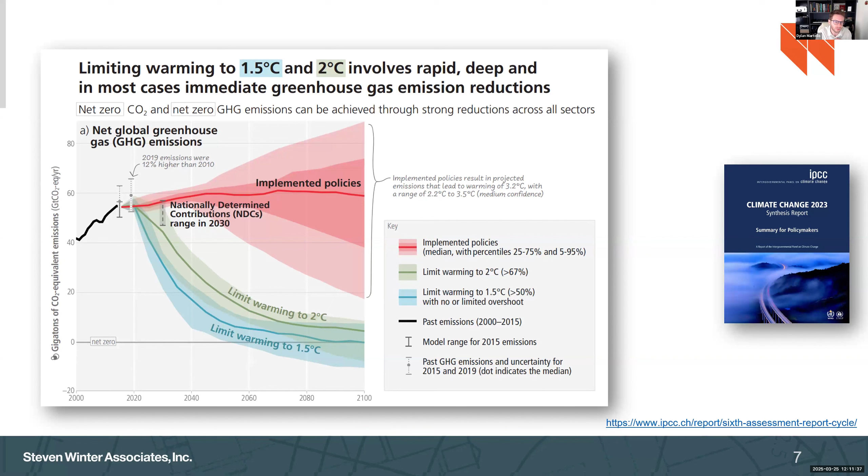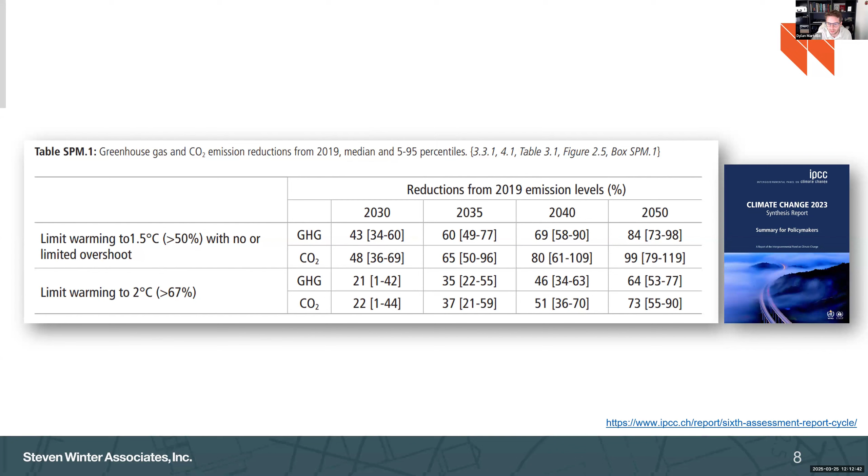So this is why I joined this field of building design and passive house design - sustainability, addressing the climate crisis that we're in. We can make an impact. We, as passive house designers, or for folks on this call that are maybe on the design side, developer side, or policy side, wherever your role may be, we are the ones that can make an impact. And I live with this question and concern in my brain all day: how can I, and how can we, make an impact to help address this problem? I think PHI LEB plays a really, really big role in this, or can play a really big role in this, especially now.

Before diving into this standard, I want to just talk about the origin story of this standard for me. So we're going to go back in a time machine 6 years ago to 2019, to a town in Massachusetts, Newton, Massachusetts, just west of Boston, not too far from it, greater Boston area, and a project that many of you probably have heard of on other presentations or conferences, the Northland Newton development. This is, as you can see, a very large scale mixed use multifamily development in Newton, Massachusetts. This is from 2019. There's some shifting in the plans that are kind of underway right now, but the general concept of this development is still intact.

Back in 2019, we engaged with the design team and ownership on this project. It's 13 buildings, most of them multifamily mixed use, with over 800 apartments, about 18% of those affordable.

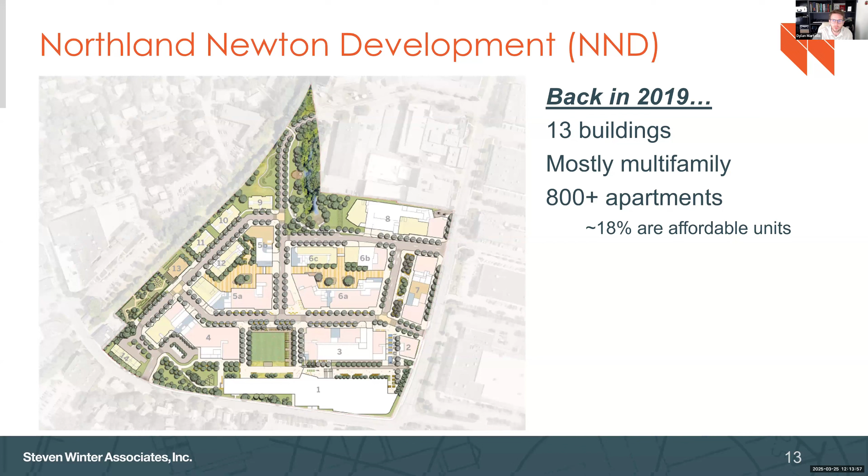For a few reasons, they made the commitment to go to passive house for buildings 3, 4, and 8 - three out of the 13 buildings on the site. This accounted for about 275 units, 410,000 gross square feet. These buildings were anywhere from 4 to 5 or 6 stories or so.

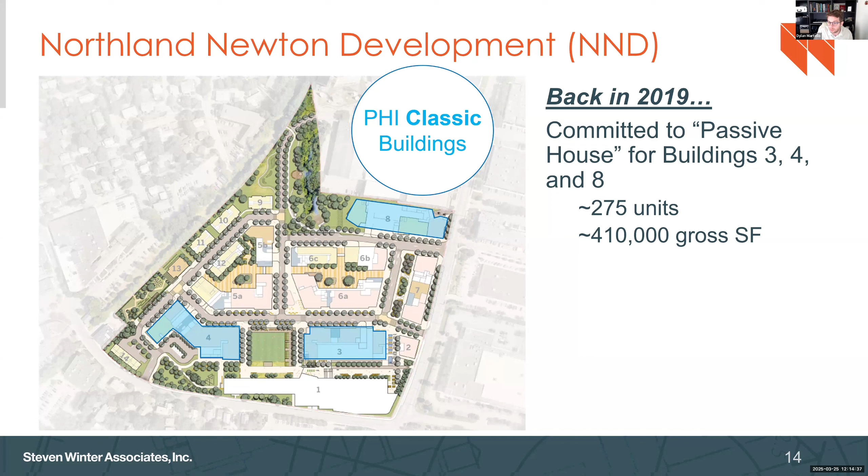So large scale multifamily, I would say definitely falls into that category - not super tall like you might see in a city environment, but still large scale multifamily. In the state of Massachusetts, for the last 4 or 5 years there's been a really awesome incentive program by Mass Save that has incentivized passive house construction immensely.

This has been a huge part of the extreme growth we're seeing in the Massachusetts market. They incentivize particularly feasibility studies, which I feel are one of the best ways to make a huge impact on a project - just do a feasibility study, get your foot in the door, let the design team know what it would take to get to the passive house level.

In particular, we looked at this building, building 12, as it relates to the LEB standard. I'll get into that in a minute.

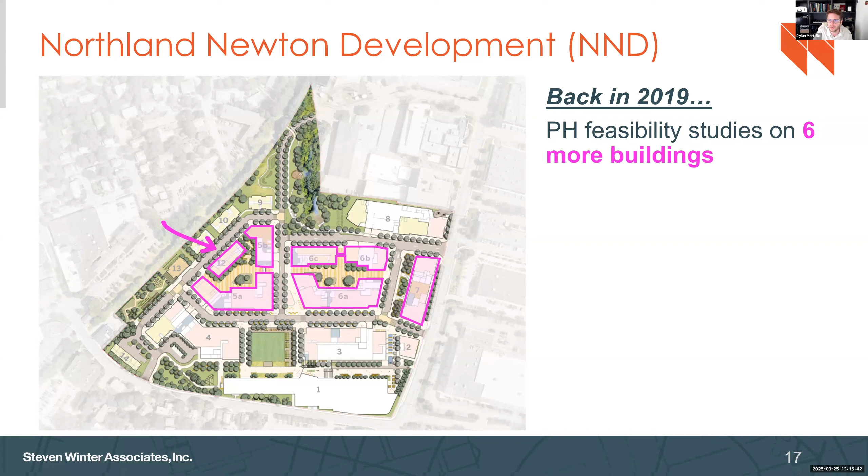So this building was 4 stories, 31 units, 37,000 square feet. It wasn't massive, but it was still big scale multifamily. It wasn't a townhome, it had over 30 units, starting to really inch into the realm of these bigger scale multifamily projects where we see that you get economy of scale, you get efficiencies in the surface to volume ratio.

Of the building envelope, we see with these bigger projects as well that we don't need maybe as much R value in our wall, or as high of a solar heat gain coefficient in our windows, because the bigger the project, the more the internal loads in the building dominate and the less the solar loads have a role in there.

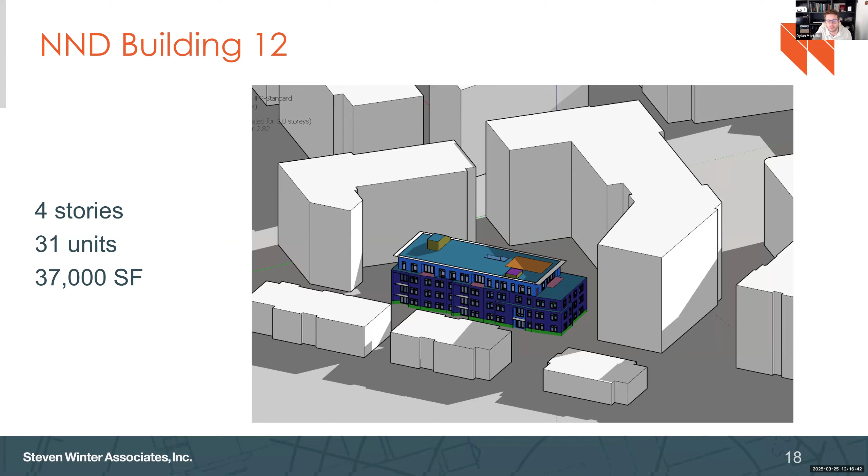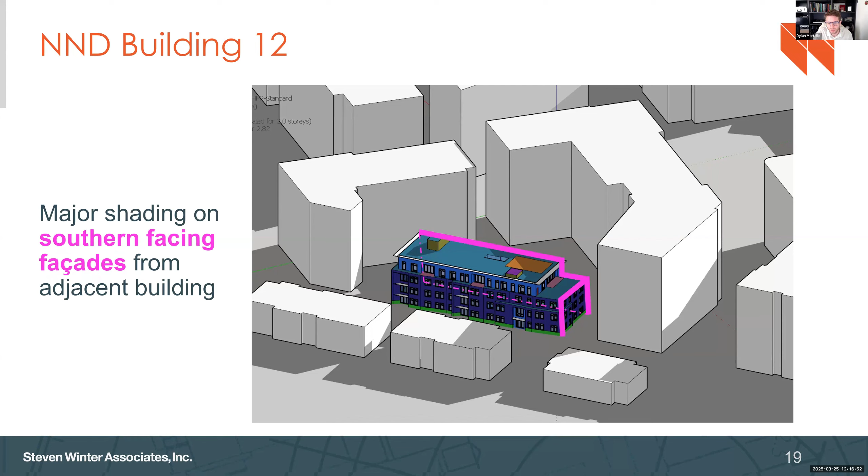That said, solar loads do still play a very important role in passive house design, really no matter how big the project is. On this project, there is some major shading on the southern facing facades from the adjacent building, and this led to some big challenges.

As a result of this shading, or taking a step back, just looking at sort of the baseline level of design specs that we were looking at for this project as a starting point: above grade walls of R33, roof R values of R57, windows - triple pane, highly efficient insulated glazing units with a U value of 0.16, SHGC of 0.37 center of glass - solar heat gain coefficient - and ventilation heat recovery efficiency of 82%.

So these are all very good specs for a multifamily building. I think it's pretty common to see these levels of performance being required for passive house design in climates like Massachusetts and the Northeast in general.

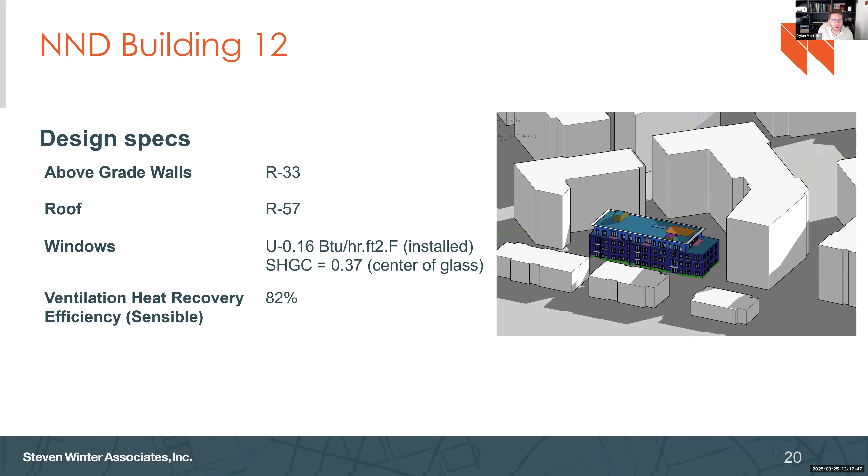Even with these specs, though, we struggled mightily to meet the PHI classic criteria. I'll get into the different categories in a minute, but the conventional passive house criteria that I think most of the industry is familiar with has limits on heating demand, limits on cooling demand, and primary energy, which is source energy for the building.

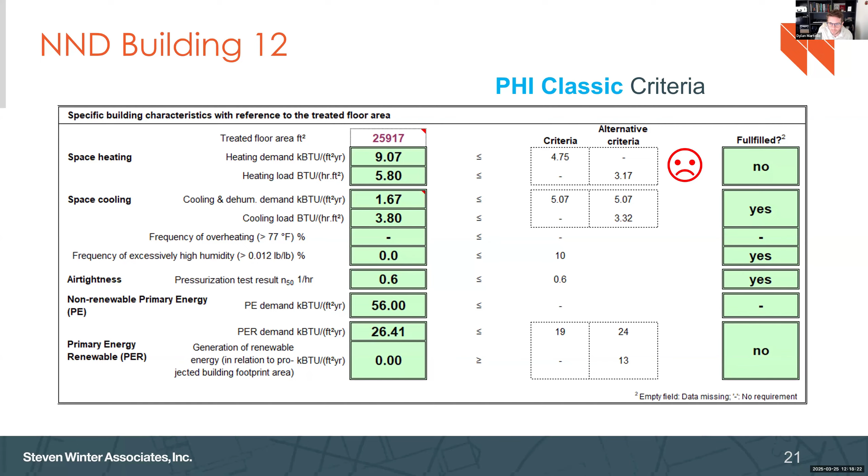We were nearly double the heating demand of the PHI classic criteria as a result, largely due to this shading. So we were like, what do we do?

We want this project to still commit to a high level of performance, something like passive house - we just have no way of getting there. There's no solar heat gain coefficient that's high enough that we can get this heating demand down. There's no R value big enough, or large enough wall size that's going to help get this heating demand down. So we felt like we had our hands tied behind our back.

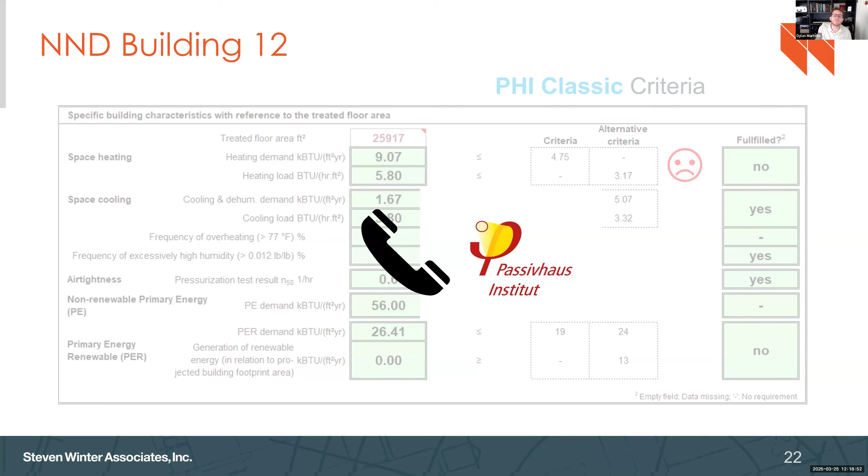So we called Passive House Institute and said, what can we do? And that's when they actually introduced the LEB criteria to us. They said, well, we have this alternative criteria called PHI LEB, and it's reserved for, or it can be used for, projects that just can't meet the classic criteria, for whatever reason that may be - if it's shading or whatever it might be.

It was really insightful to get this piece of information and recommendation from them, and it led to some interesting further discussions, which I'll get into in a minute. But before diving into that, I want to talk about what the LEB standard actually is and what the mechanics of this are.

Within the criteria, this is the latest version 10C from PHI. They talk about the different levels of certification for a project. The one we're probably most familiar with is Passive House Classic. There are upgraded levels to that, Plus and Premium, particularly for projects with even lower energy use intensity and even greater renewable energy production. But PHI Classic is the most widely adopted standard for buildings. There's also the EnerPHit standard, which is for retrofits, which I won't talk about here.

And then they talk about the PHI Low Energy Building standard in that criteria as well. So this is just straight from the criteria: buildings which do not comply with one or more of the Passive House or EnerPHit criteria may still satisfy the PHI Low Energy Building standard.

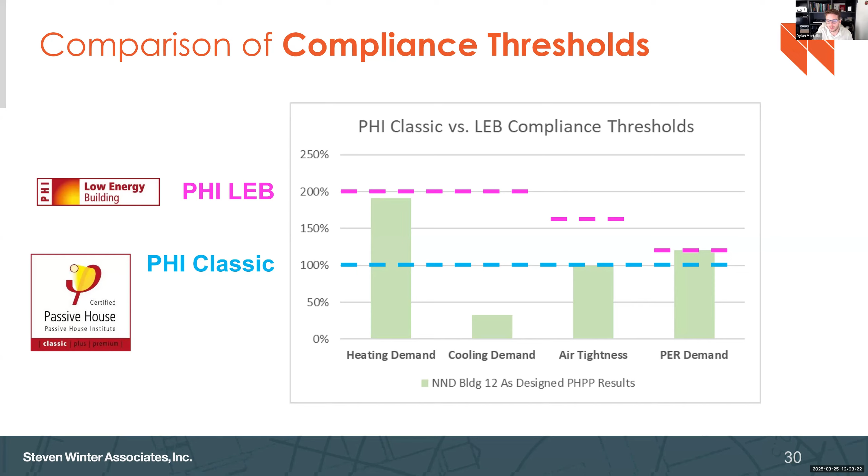So the goals of the Passive House standard, we're probably all familiar with this: steep energy reductions, particularly in heating loads, or steep reductions in heating loads. Really steep energy reductions across the board for these projects, but where Passive House is really, really effective is at reducing heating loads. We're smashing down heating loads.

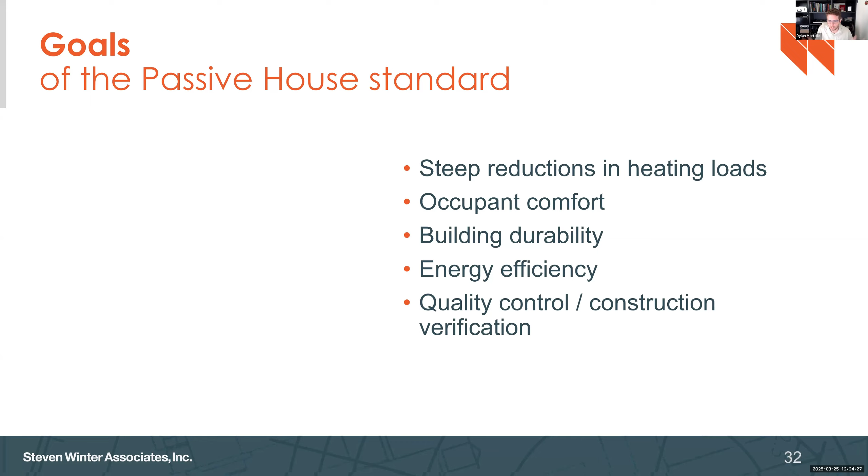It's also really good at providing occupant comfort, building durability and longevity, and reducing potential for mold growth in wall systems and the like. Energy efficiency across the board is obvious, but it's also really, really good at ensuring quality control and construction verification for projects. So you have to do very detailed inspections and photographic documentation of the building as it's built. There's on-site verification of the ventilation system's performance and flows for ventilation air. And then there's the whole building blower door test where we're verifying air tightness for the project at the end of construction. These goals are achieved in both of these standards, PHI LEB and PHI Classic.

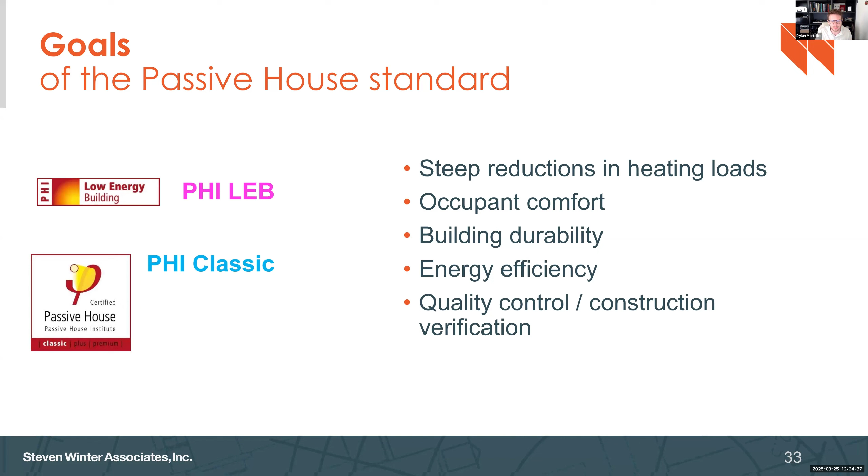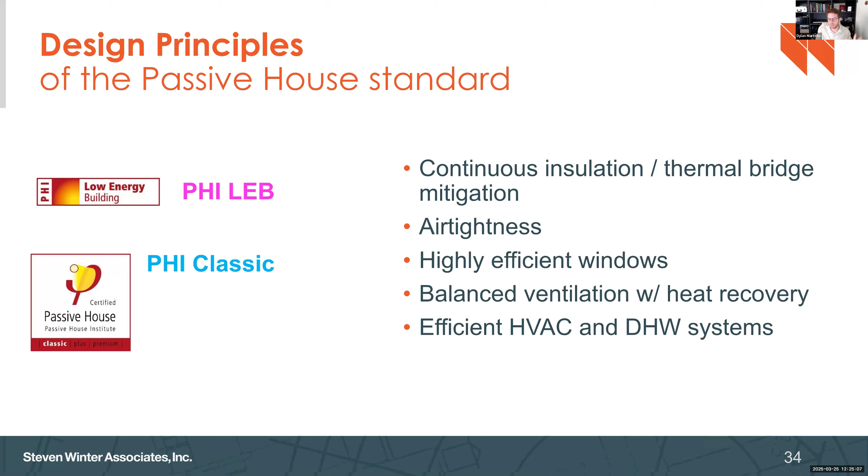When we think about the design principles of the Passive House standard: continuous insulation, thermal bridge mitigation, air tightness, highly efficient windows, balanced ventilation with heat recovery, HVAC, and domestic hot water systems. Again, all of these design principles apply to the Passive House standard, both PHI LEB and PHI Classic. There are just differences in the thresholds that are considered passing or not passing, but the concepts, the principles, and the goals are the same.

So, just some other key differences with the PHI LEB standard versus the classic standard. Air tightness: the PHI classic standard is 0.6 ACH 50, while the PHI LEB standard is 1.0 ACH 50.

There is, however, a specific clarification within the criteria that if a project falls between 1.0 ACH 50 and 0.6 ACH 50, additional on-site leak detection must be carried out during the blower door test.

This requires the testing agency to go around the building, look for air leaks, document the air leakage at that specific location before any sort of measures were taken to seal it, photograph it, seal it with whatever measure is available on site, typically caulk, a spray foam product, or a taping material, and then document how that air leakage was reduced after the seal was done.

So you actually get this extra layer of quality control and verification of potential leakage areas that can still be addressed if it falls between 0.6 and 1 air change per hour. So yes, it's a more relaxed standard, but there are other strings attached to it that help ensure you're not resulting in any problematic leakage areas that could cause building durability problems.

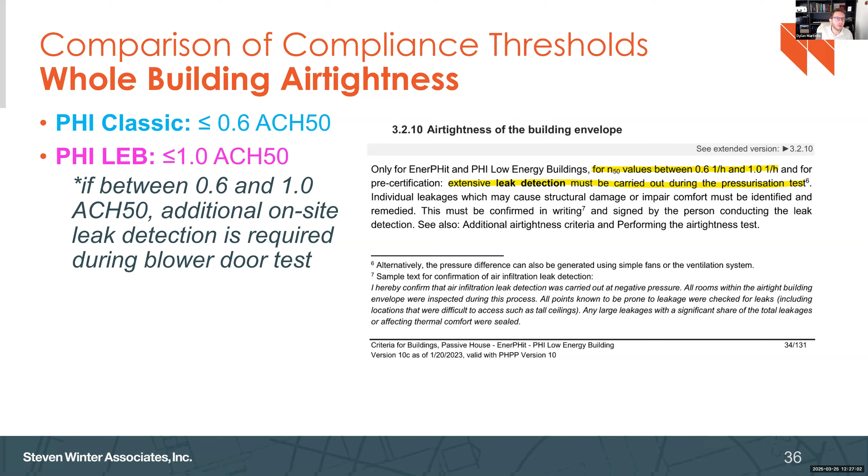The other difference is the thermal comfort criteria is essentially waived for the PHI Low Energy Building standard. This will probably get some questions, but my take on this—and I'll talk about the performance levels required to meet PHI LEB—is that for opaque surfaces, meaning non-windows, so typical above-grade walls, ceilings, and floors...

In our climate, Northeast, particularly Massachusetts, since we're talking about the Northland Newton development prior, you need about R8 in your opaque surface to achieve adequate thermal comfort. This is a check done within the PHPP on the areas tab, and a similar check is done on the Windows tab. R8 is that threshold—you're not going to really pass if your walls are not above R8.

Where this can actually have a big impact, though, is on the performance of windows required. The thermal comfort criteria required under the PHI Classic standard is a U-value threshold for the overall window—this is the installed U-value of the window. So it accounts for not only the glass, but the frame, the glazing edge spacer, and the thermal bridge created at the window-to-wall connection.

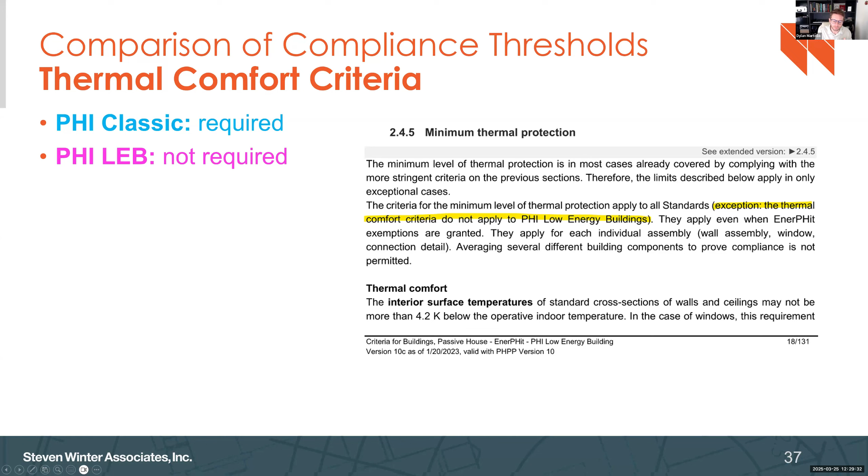More on this in a minute when we talk about specific design specs for projects.

Jumping back to 2019 and talking about Northland Newton Building 12, we reran this project under the LEB criteria. Basically, in the PHPP, you can go in and change the PHI classic threshold—there's an option on the verification tab to select PHI LEB. We saw that we were now meeting our heating demand threshold that was giving us problems before.

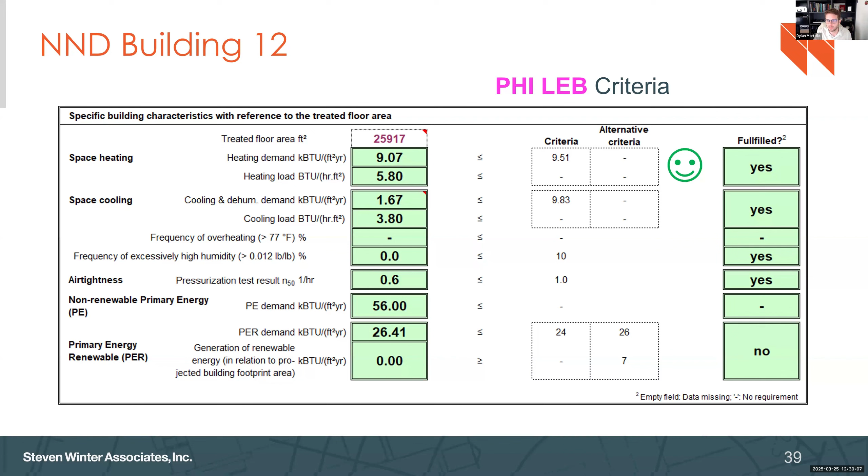It led to an interesting follow-up. As a result of those feasibility studies we did, not only for building 12 but for the other 6 out of the 9 buildings I talked about—those pink buildings—the client realized: hey, we can actually commit to the PHI LEB standard on these 6 other buildings. We were introduced to this concept for building 12, and I think there's no reason we wouldn't do it for building 12.

So why wouldn't we do it for these other buildings, when we can expand our commitment to passive house. The challenges of meeting Classic on Building 12 and some of these other buildings, which were heavily shaded, particularly on the southern facing facades, just allowed a pathway for this client to expand their commitment to passive house.

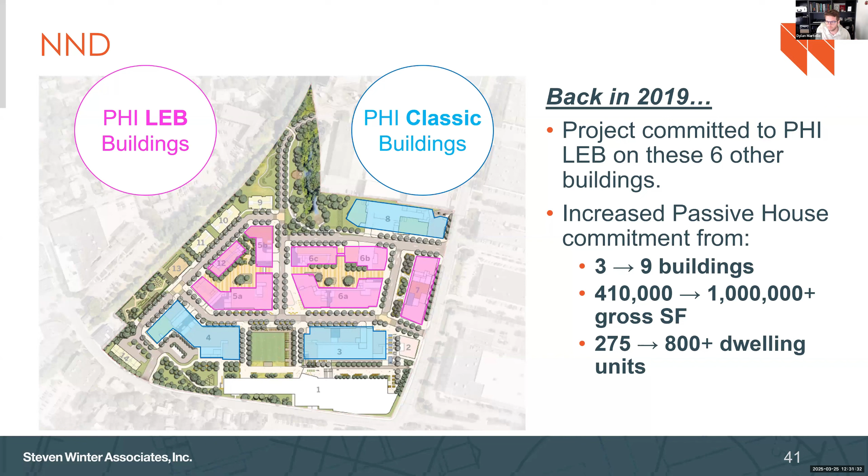And what this meant was going from 3 buildings, which were the blue, to 9 buildings, going from 410,000 square feet to over 1 million square feet, and 275 units to 800 plus dwelling units. So huge improvements in terms of the scale of passive house commitment. And that was really made possible because of the PHI LEB standard.

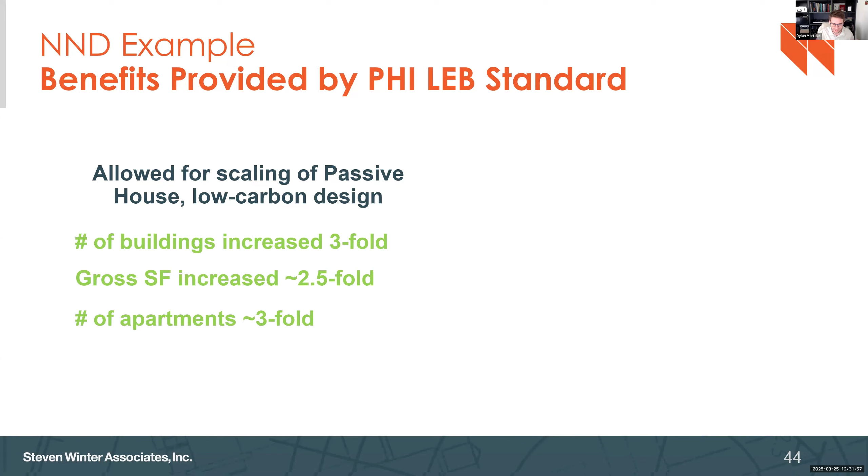So as far as the benefits that were provided, it allowed for scaling of passive house low carbon design. We saw basically across the board a 3-fold, 2.5 to 3-fold increase, no matter which way you look at it, in terms of the scale of passive house commitment for this project.

And this is something I think is really important. It allowed for better alignment of the technical specifications across all 9 of these passive house buildings. So what I mean by that is we could have a similar wall construction and R value target for all of these buildings, which translates to similar details, similar wall types, if not the same wall types, which is really important for thinking about a development like this, where you have a lot of buildings and probably the same contractor for all of them, and you want to benefit from these efficiencies of scale and similarity across buildings.

I understand that not every building is the same, and the whole idea with passive house is that you're doing a model for each building and fine-tuning your design for each one. I'm a firm believer in that approach. However, I do think that when we can capitalize on efficiencies of scale in multiple buildings within a development, we should think about how to take advantage of that opportunity. And PHI LEB allowed us to do that on this project.

It also allowed us to have the same window specs for every building on site. So for Northland Newton Building 12, the U value of 0.16 and SHGC value of 0.37 - we were able to get that window spec to work for all buildings. So the client could purchase one window for all buildings, which was key, because when you're talking about one window used for 1 million square feet of development, there's a specific cost benefit to the economy of scale there, as opposed to having, say, 4 or 5 different windows across the development, where you'd have to get specialized with the specifics of each. I think that was a huge benefit on this project.

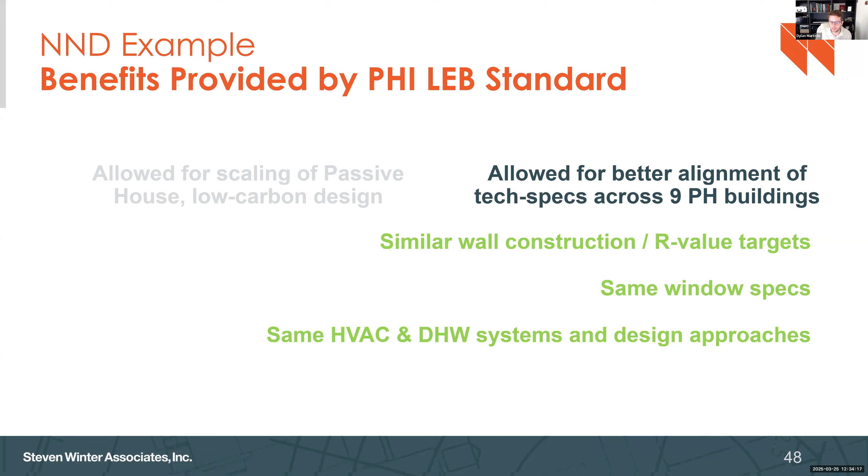We want to make this happen here. Passive House has really grown in the last 10 years, and I feel like we're at a point where we can really help get to this level of large scale Passive House development.

And I really feel that PHI LEB can help us get to this level, especially in our climate in the Northeast, which I will die on this hill and say is one of the hardest climates to design in, because it's really hot and humid in the summer and really cold in the winter. Each climate has its own challenge, but the Northeast is very challenging to hit the stringency of the heating and cooling demands, the extremes that we have.

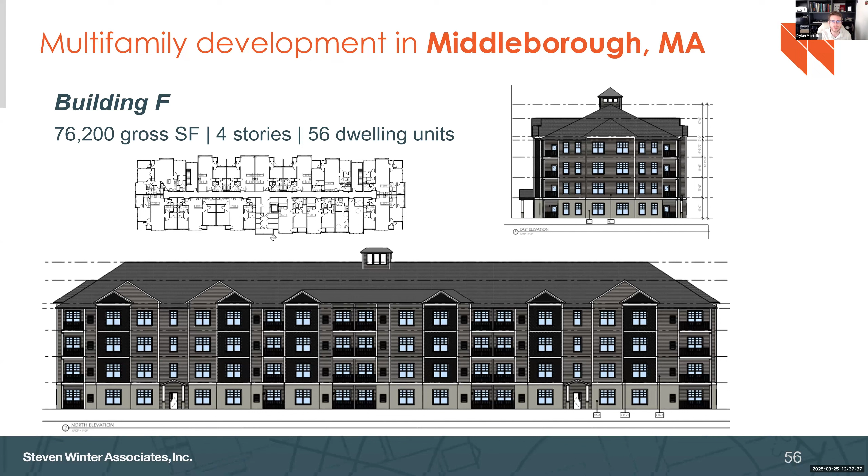So fast forward to another case study. This one is in Middleborough, Massachusetts, somewhat between or near Providence, Rhode Island and Boston on the southern end of the state. This was a more recent feasibility study that we had done. It's a project of about 76,000 square feet, 4 stories, 56 dwelling units. Nothing out of the ordinary for a multifamily building. You can see a snapshot of the floor plan there.

As far as the exterior elevations are concerned, the window to wall ratio and facade types are very typical - nothing out of the ordinary about this building. To get to PHI Classic, we needed about an R33, and to get to PHI LEB, we needed an R28. We still needed a pretty dang high level of R value to get there. It wasn't a huge gap in performance requirements for that envelope system between the two.

When looking at windows for PHI Classic, we needed to go down to an installed window U value of 0.14. For PHI LEB, we could walk that back to about a 0.16. Again, not a huge difference in overall performance. It's still a highly efficient triple pane insulated glass window to get to PHI LEB. It's not like we could walk that back to a good double pane window - there's just no opportunity for that. You still need a very highly efficient window to meet this criteria.

The solar heat gain coefficient is where this issue has really started to grow in my mind, in terms of how we can optimize our buildings for efficient design. For PHI Classic, we needed an SHGC value of 0.45 to 0.47, whereas with PHI LEB, we could reduce the SHGC value to somewhere between 0.33 and 0.40.

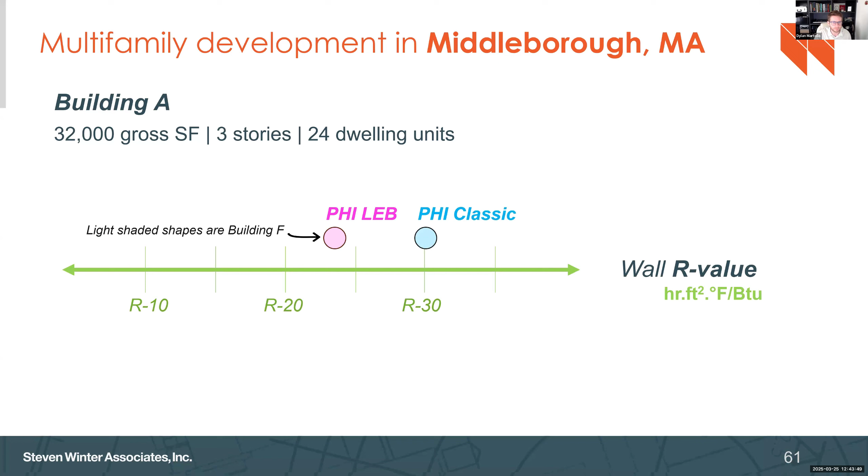What we found was quite interesting. So what you're looking at here, the circles with lighter shades are the building F requirements, and the triangles with brighter shades of pink and blue are the building A requirements. What we found is that we needed essentially the same wall R values

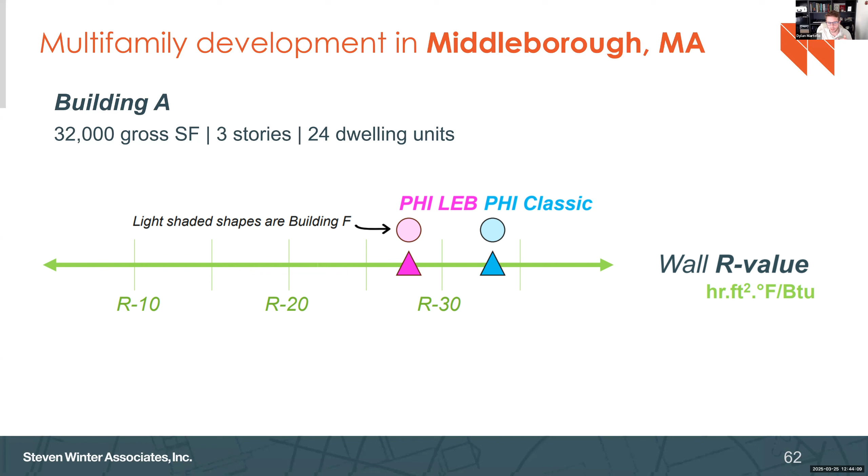that we needed at building F for the Classic and LEB standard. When looking at windows, we needed the same U value, or essentially assumed the same level of performance for the U value of the window. But for PHI Classic, for the window SHGC value for this building, we needed it to go as high as 0.55 to 0.57, which again makes us a little uncomfortable when we're having to ask the MEP engineers, is this going to result in potentially an upsizing of our cooling systems?

For PHI LEB, we can walk that back down to anywhere from 0.40 to 0.44 or so. This was important because it allowed us to potentially get the same window for both buildings. So we're seeing that benefit that I talked about on Northland Newton, where we were able to have the same window be suitable for multiple buildings in this development, which will help adoption of the Passive House standard and the scaling across buildings and developments like this.

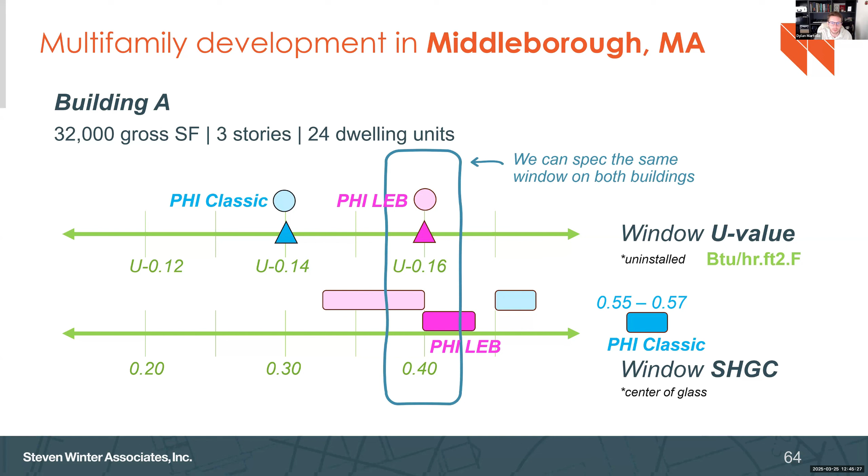And again, ERV sensible recovery efficiency, we needed to go to 85% for Classic and 80% for PHI LEB. So still, again, a very highly efficient unit.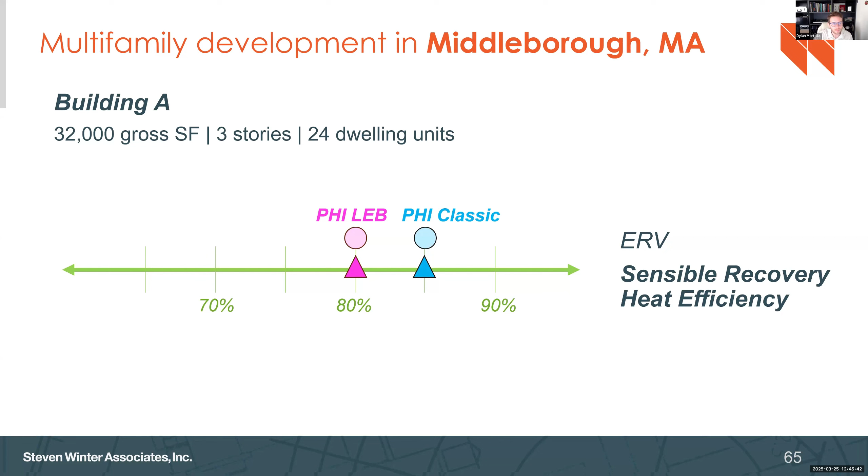The last thing I want to quickly talk about here is the topic of cooling and keeping tabs on cooling here. As I mentioned before, we, as Passive House designers in the Passive House design community, have an obligation to think about how we can deliver the most optimal energy efficient building. One interesting study that I was involved in last year was funded through the U.S. Department of Energy.

We did extensive monitoring on 3 buildings, 2 of which were certified Passive House buildings and 1 which was a more conventional building. All 3 were large-scale, high-rise multifamily developments in New York City. This is a climate that's a little less heating intensive compared to, let's say, Massachusetts or northward, but still very much that typical Northeast climate where it gets really cold in the winter and very hot and humid in the summer. The first building I'll talk about is one that Ken actually mentioned earlier, Sendero Verde in Harlem, New York.

Particularly the Sendero Verde B South building, this is certified to the PHI Classic criteria. As part of this study, we did our own load calculations and cross-referenced the mechanical engineers' load calculations and compared our results to theirs. There's a whole study that's going to come out, hopefully sometime this year. Obviously, the state of the federal government is a bit in flux right now, but essentially what we found is that the cooling loads for the typical studio, 1-bed and 2-bedroom apartments were at least about double, if not 3 times, what the heating loads were on this project.

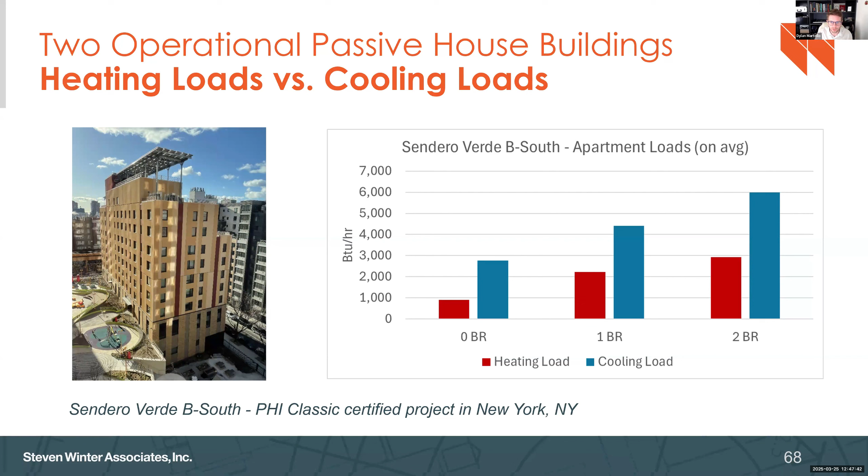I'm going to jump to another project as well, 425 Grand Concourse in the Bronx. This is the other one that we studied. This is actually a PHIUS certified project, so I know we're talking about the PHI standard here, but this is the project we studied, this is the data we have. I'm not going to get into the differences in this presentation. We can certainly talk about it in the Q&A between PHIUS and PHI, LEB or Classic, but long story short, it's a Passive House building, right?

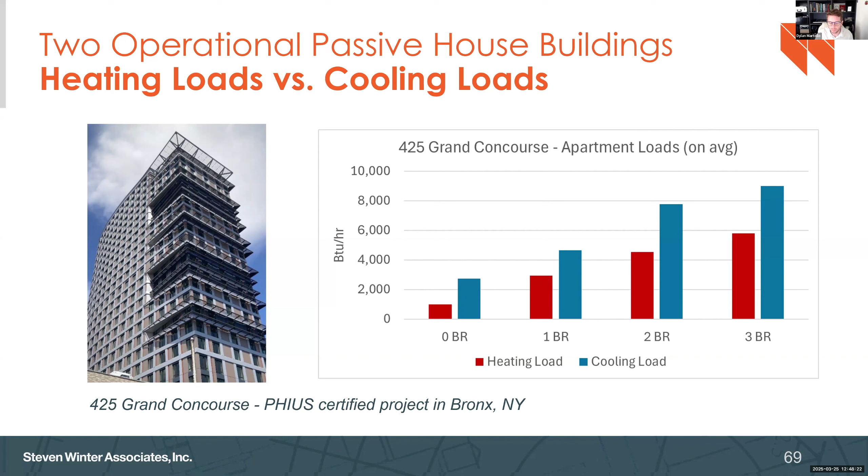It's those same design principles, those same goals. Cooling loads are also about double what the heating loads were. So I'm looking at this and going, are there opportunities to optimize? Can we do better? Can we help create a better balance in these buildings, so that way we're not super oversized on heating, but just right-sized on cooling?

We're also very limited in terms of the capacity of units that are available, so we may actually potentially be losing out on efficiency when we're super oversized in heating, because the unit can't turn down as low as it maybe needs to meet these super low heating loads. So I think there's actually an opportunity to optimize, to bring a better balance between cooling and heating loads.

And as I mentioned before, I think PHI LEB can be a tool to help alleviate some of these design decisions that potentially are exacerbating the cooling load, which is the window SHGC in particular. And then the other element of this is really, the higher the R-value in the wall, the more of this thermos effect that we can create in the building.

And that has an implication, particularly in the swing seasons, when we want the building to actually help flush heat out, especially when we have an internally dominated building with a lot of internal heat gains. In the summer or swing seasons, when it might be mild out, if we have a lot of insulation in the walls, we're trapping that heat in the building.

And I think there's something to be said about, as I mentioned in the example, PHI Classic we had an R33 wall, and for PHI LEB we had an R28 wall. Does that difference help us flush a bit more of that heat out in those swing seasons and help mitigate the overall cooling demand in these buildings?

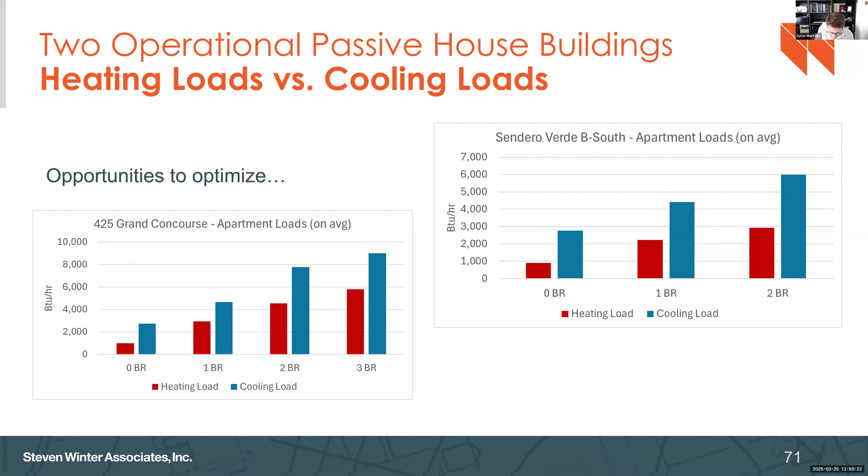The last thing I'll say is that, like I mentioned before, I've been doing passive house for a long time, worked on a ton of passive house classic buildings. I'm a firm believer in its effectiveness. We have data that I didn't even have time to show, that shows how much lower these heating loads are, measured data compared to conventional buildings. We truly have done incredible work at smashing these heating loads down.

But I view PHI LEB as another tool in my toolbox of options to help further improve these buildings and further improve the overall performance and design of these buildings. It's not always going to be the answer for every building type. I just think that particularly for multifamily, especially in these colder climates where we have very stringent climate files and things that make that heating demand very hard to meet...

But we have big buildings where we have a lot of internal loads and a lot of heat generated in the building. We need to think about cooling. It's only going to get hotter with climate change, and this is something that I can confidently say keeps me up at night.

So I am happy to get into questions. I don't have all the answers, but hopefully I can at least be helpful in enlightening folks about this topic. So thank you all for listening, and let's chat.